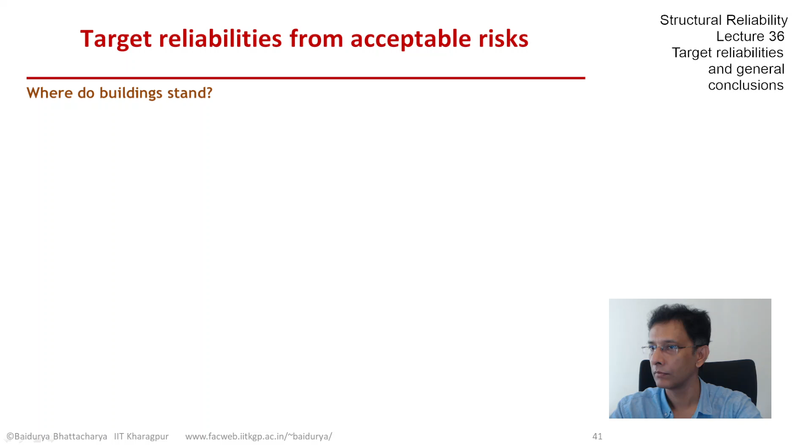Putting all these surveys together, we find that society's attitude towards an individual's involuntary fatality risk, if it is 10 to the minus 3 per year, it is clearly unacceptable. On the other end, if it's 10 to the minus 6 per year or less, then it's acceptable, it's okay. And in between these two limits, 10 to the minus 4 per year seems to be tolerable, but barely so. We would like it to be less.

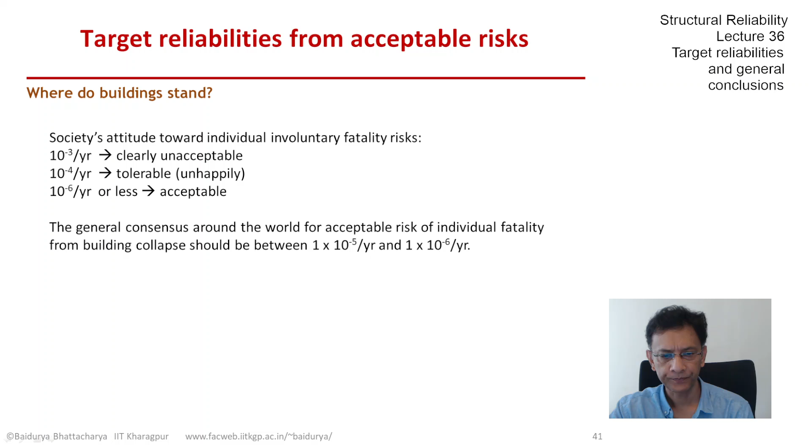Now, with these in mind, we find that the general consensus that has developed around the world for acceptable risk of an individual fatality for a member of the public from building collapse should not be more than 10 to the minus 5 per year, and if possible should be closer to 10 to the minus 6 per year. So that's what we find the acceptable standards now. If you want more information, I would refer you to these two papers.

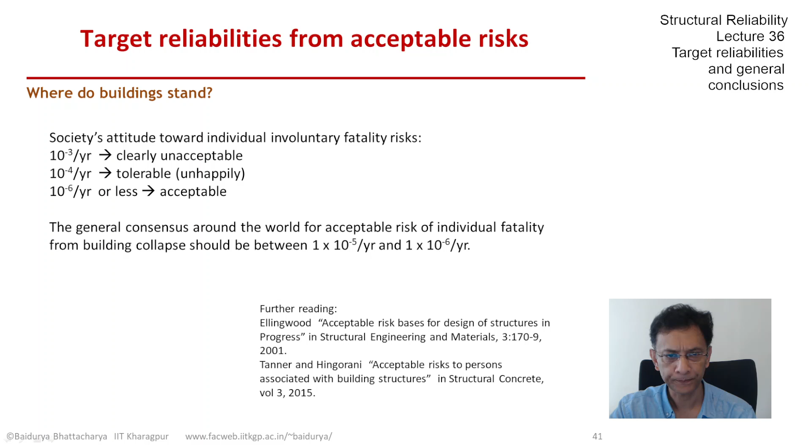Now, continuing with our earlier thought that building failure or a structural failure does not necessarily lead to one potential fatality, there could be multiple fatalities. So it's instructive to see how investigators and agencies have handled that possibility. One of the earliest examples that we see in setting allowable annual target failure probabilities for structures came out of the UK in 1977, the CIRIA report.

It's instructive to see this equation and go term by term. So the allowable PF is the product of three numbers. So there is P prime, which is the base rate, and it's 10 to the minus 4 per year, as we just discussed. Now, this base rate can be adjusted by two numbers, and one is KS in the numerator, and NR is number of people at risk, so number of potential lives lost. So clearly, CIRIA felt that it's just proportional. If more lives are lost, then the single individual's fatality risk should be reduced exactly in that proportion.

Now, this number KS depends on what sort of structures we have and whether the risk is voluntary or not. So if it's an offshore structure, for example, it's quite likely that the person on board the offshore structure is a professional and has done so fully knowing the risk. So then the allowable PF can be multiplied by a factor of 5.

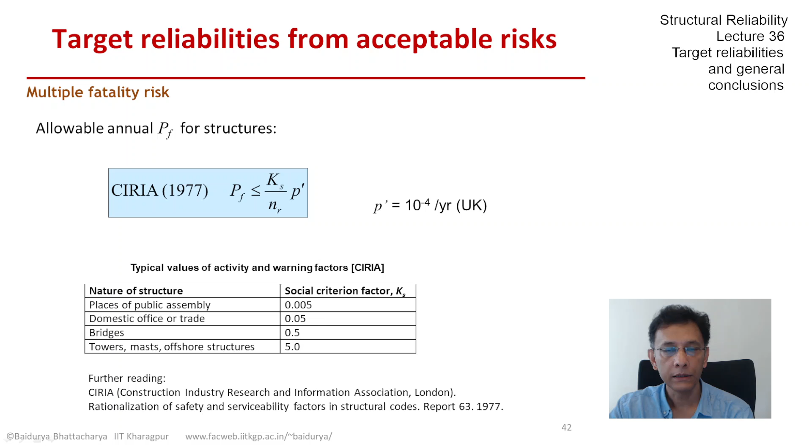The next example came out of Canada, and this is a paper by Allen. And this is interesting. It has a different logic. The P prime quantity is still there, but there are three factors now multiplying P prime. And the first thing we notice is the presence of square root of NR. So here the allowable risk is not going down proportionately with number of lives lost, but with the square root. So this model is kind of insensitive to a larger number of deaths in one accident.

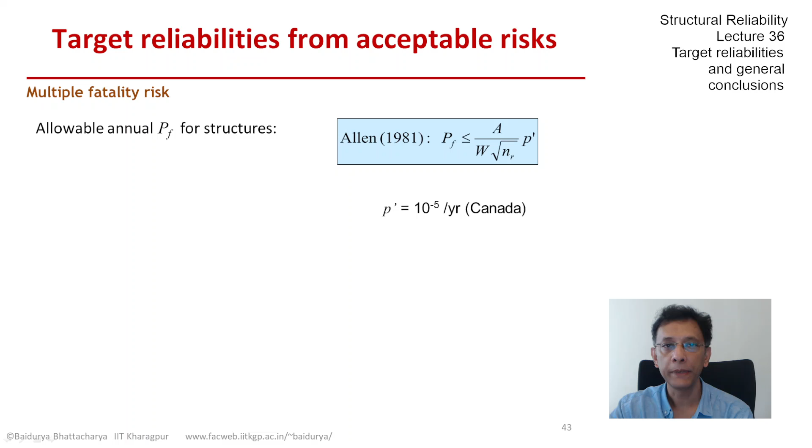The other, this P prime is 10 to the minus 5 per year. That's the base acceptable probability. But then we can see the different multipliers, A in the numerator and W in the denominator. So let's take a look at A first. If it's normal activity, then we don't change P prime. If it's high exposure, so again, if it's construction work or offshore work, then it can be even increased by a factor of 10.

For bridges, it's something between normal activity and high exposure. So A takes care of the activity, which in some sense looks at the voluntary or involuntary nature of the exposure. The warning factor, W in the denominator, that would be 1 if there is no warning at all. So it's complete sudden failure.

And we have seen these earlier when we were discussing all the design standards who are putting acceptable PFs depending on consequence of failure. So if the failure is gradual or if complete fail-safe condition, then the PF can actually be increased. So W can be less than 1. So it could be even 10 times more if there is adequate warning. So that's the sort of suggestion that came out of Allen's work.

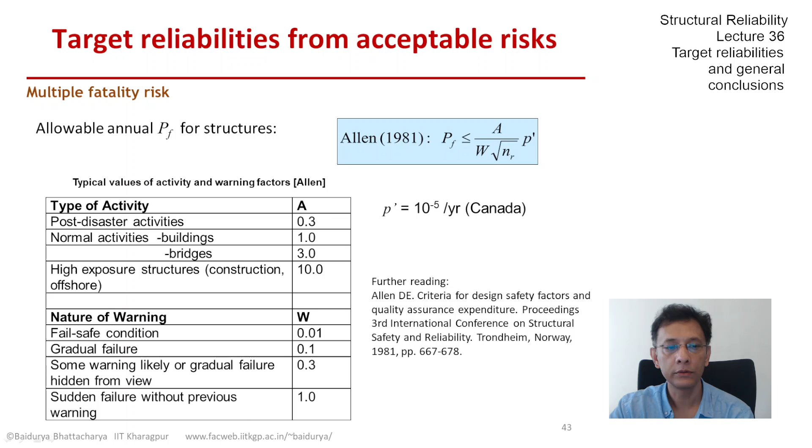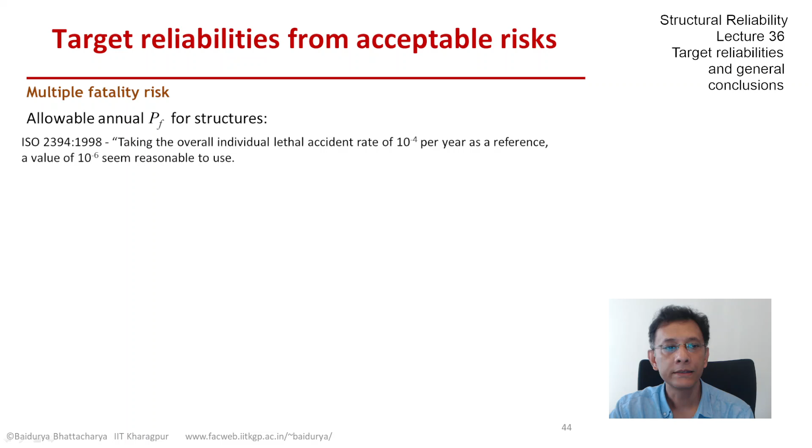Almost 2 decades later, let's go on to one example, and this is now an international standard, the ISO 2394 of 1998. So let's read some of the texts from the standard carefully. So clearly, the 1998 edition of the standard says that 10 to the minus 4 per year of an individual's risk of death is acceptable, and then, based on that, 10 to the minus 6 would be that from structure. So that would be the limit they would like to put from failure of building structures.

So expressing the failure as the product of one conditional, the death from structural failure is probability of death given structural failure times the probability that the structure fails. It should not be more than 10 to the minus 6 per year, as they just stated, and then the structural failure probability should be limited to 10 to the minus 6 per year divided by the probability of death given the structure has failed. Now, obviously the worst case would be 1, so we would have 10 to the minus 6, or somewhat higher if the failure of the structure does not necessarily lead to an occupant's death.

Let's compare some of the numbers now with what we observe in terms of building collapse frequency. Actually, we have some estimates. This number is from Ellingwood's paper, the one that I just referred 2 or 3 slides back. So most published estimates of building collapse are found to be less than 10 to the minus 5 per year in the US.

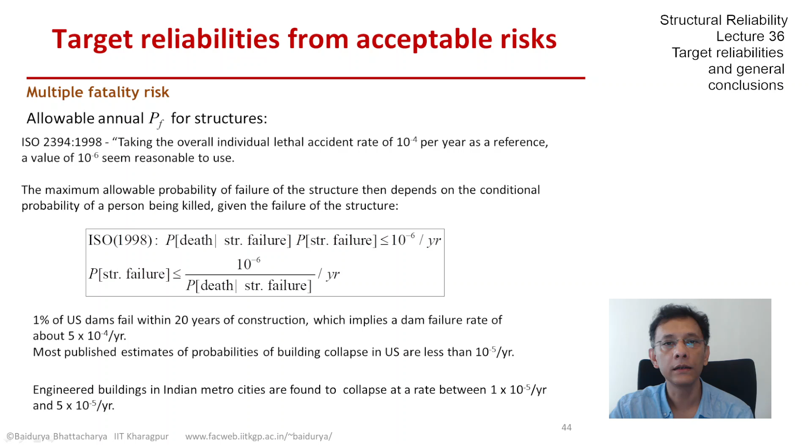Now, let's see how ISO 2394 handled the possibility of multiple fatalities. So this statement is instructive, that where a large number of people may be killed, the authorities would like to avoid such accidents. And then the requirement that ISO 2394 of 1998 suggests is that it should be proportional to 1 by NR squared in the denominator. So if more number of people would be killed, PF should be reduced disproportionately. So more emphasis is given on the number of lives lost in a single event, not proportional, but NR to the power of 2.

And then we see that alpha is 2 in the denominator, which is the exponent of NR. And then that A value could be 0.01 or 0.1. Those are just examples, but it shows that PF would be further reduced. So that would be the factor which we are going to use to set PF. Interestingly, an economic based analysis in the next revision of 2394 actually changes that approach of alpha of 2 and brings back alpha to about 1, and that's what we'll see later in this lecture.

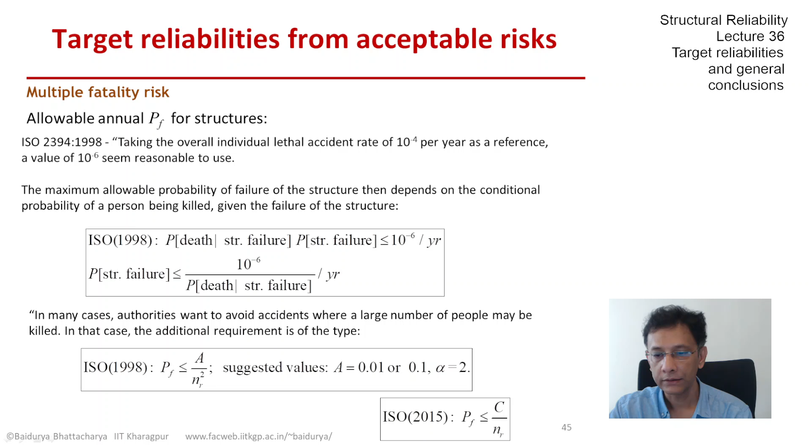Putting all of this together, it seems that for multiple fatalities, or with the possibility of multiple fatalities, PF should be less than the number of lives at risk to the power of minus alpha, and alpha, depending on the investigator and the agency and their priorities, could be 1, could be less than 1, could be more than 1.

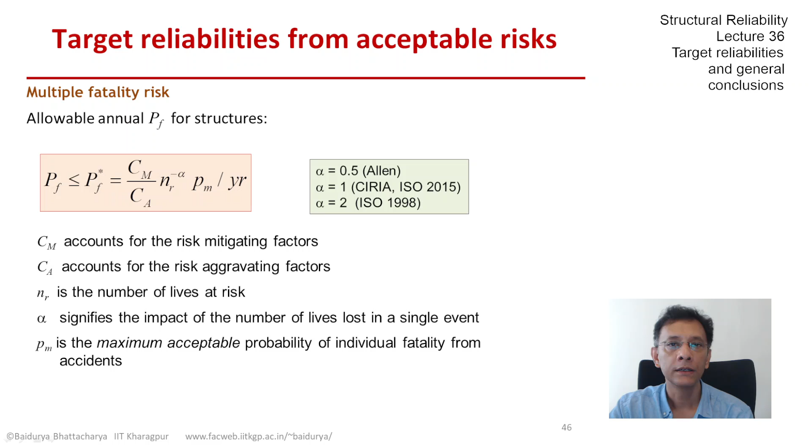And then there are factors which could increase this acceptable probability of failure if there are risk mitigating factors, or they could further decrease this if there are risk aggravating factors. And then multiplying that is always the maximum acceptable failure probability, which could be of the order of 10 to the minus 4 per year or such, depending on society's attitude towards such risks.